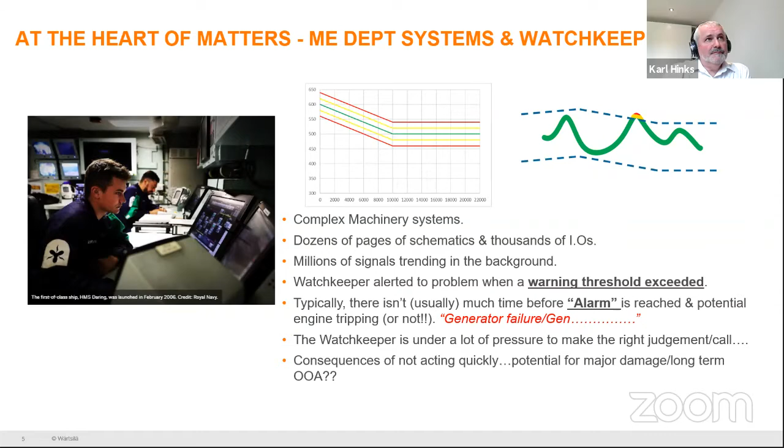So up until now, we've got machinery parameters, if you like, hundreds, if not thousands of different signals from the engine. And you have basically an envelope in which the equipment will operate. And it will come into alarm when it exceeds a particular threshold. And it may well shut itself down, or it may well come back into limits, depending on a lot of different variables, including things like ambient temperature, air inlet pressure, differences in the fuel, calorific values and things like this.

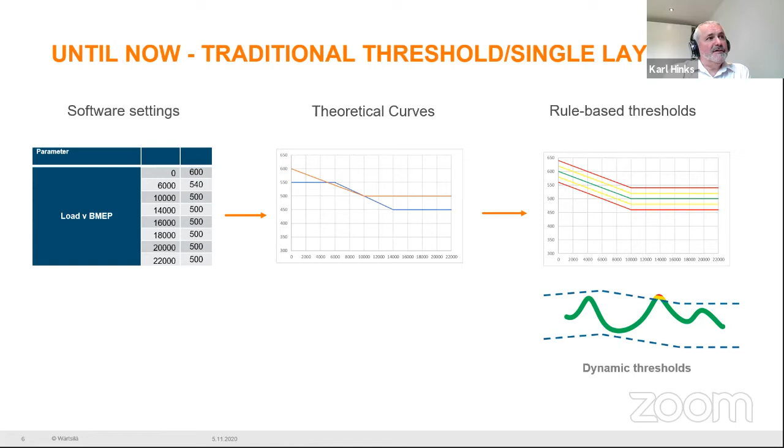So this is very much a kind of digital system. It's either in or out of parameters. The problem with that is that you don't get a very long time before you have to react, or the system has to react before taking the equipment out of service. And clearly you don't want to do that without bringing a second or a replacement generator onto the board.

So it's a bit like a human being. There's no way that he's going to be sitting in the machinery control room or ship control center looking for this information. And even if they're looking at the trending data, the differences in the signal parameters can be so small that a human would have difficulty identifying the anomalies, and it's very subjective, it's very individually based judgment on what the operator considers to be acceptable or not acceptable in terms of a parameter.

But essentially a computer can do this all day long, running in the background, trawling through the data and trying to learn what would be typically normal behavior and what would be abnormal behavior. And that's really where this presentation starts, in the role of artificial intelligence and machine learning. And every engine has its own particular footprint, if you like. It's not as simple as putting a threshold value, because due to a number of different factors, not least engine tolerances in the manufacture, but also equipment material differences, every engine will be just slightly unique.

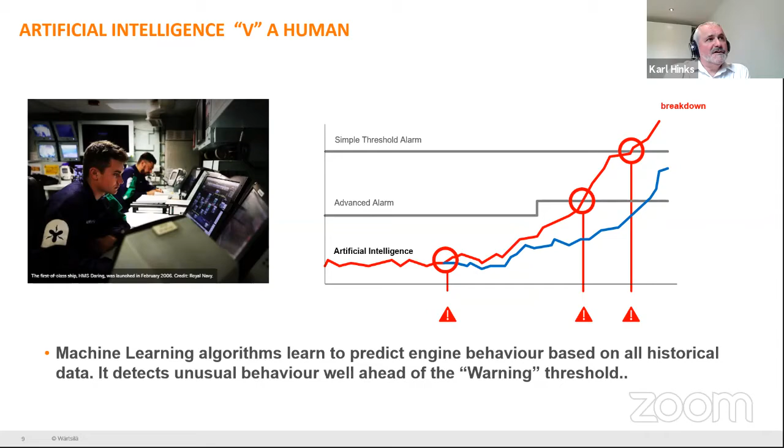So being able to learn the behavior and then identify anomalies, differences in behavior of a specific asset, is hugely beneficial. So for that, we use what we call two layers of detection, the artificial intelligence being one, and the traditional rule-based mathematical models being the other. And the system will look at both of those avenues and determine whether or not it's acceptable behavior, what it's expecting to see or not.

And at that point, the system will be analysed by an engine expert who has access to a lot of other experts as well. And in a little while, you'll see just how critical that can be, because artificial intelligence on its own is just a tool. What you really need is the kind of interrogation, the analysis and the experience to be able to make a judgment based on what you see.

And clearly, we don't want to be alerting the vessel every 5 minutes of a small change in a parameter if it really doesn't matter. On the other hand, we absolutely want to be alerting the user to issues that are going to ultimately cause either wide-scale damage or impact on the safety of the operators.

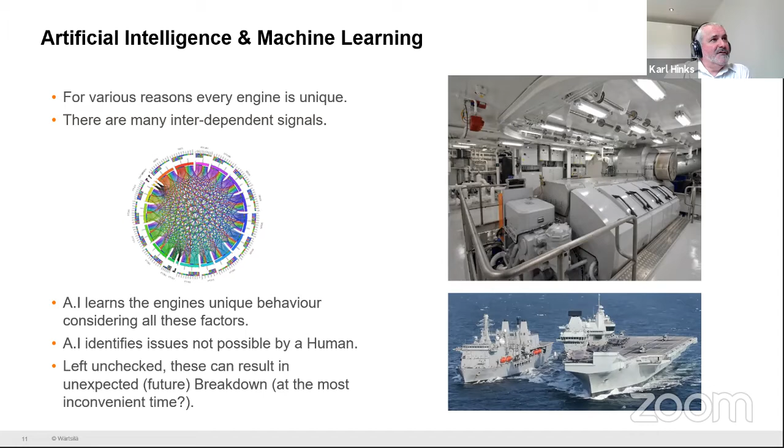So, however good your people are and however well trained they are, they're never going to be as knowledgeable as the experts, the OEMs. But equally, navies don't want the OEM rocking up every 5 minutes and getting involved with breakdowns. It's just not cost efficient. If you can automate that and you can do stuff remotely, then that makes an awful lot of sense.

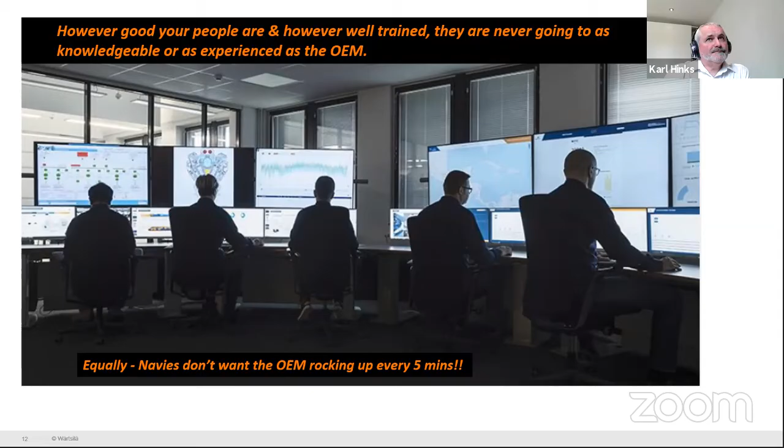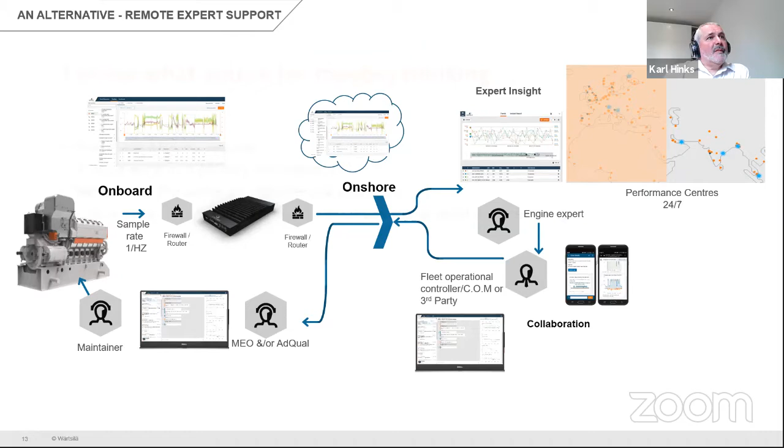So I know what some of you may be thinking, that these are military vessels and it won't necessarily work in a military environment. And yeah, you're not commercial vessels, and knowing where you are and what you're up to, you don't want others knowing that. But if you think you're any different to the commercial operators, I don't think that's necessarily true, because they have the same concerns and the same problems. The enemy may be different, but the task is the same.

So whether you're an LNG carrier or a cruise ship, having the artificial intelligence look at the data and alert you to potential problems is hugely beneficial. Especially if you took a cruise ship, for instance, the amount of equipment and systems on board there, and the cargo is very vocal, and it's all very much in the public domain if things don't go quite to plan. It's just that you do business in slightly different ways.

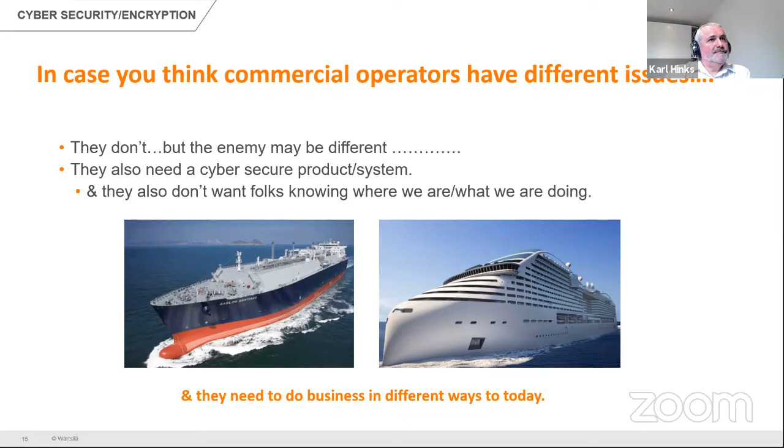So here's an example of a real case. This was a vessel, a dual fuel engine shuttle tanker. It was en route to pick up its cargo. It had the expert insight system fitted. And the screen now gives an indication of how the system communicates with the vessel. This may well be slightly different in a warship, given the encryption needed or the timing of the communications.

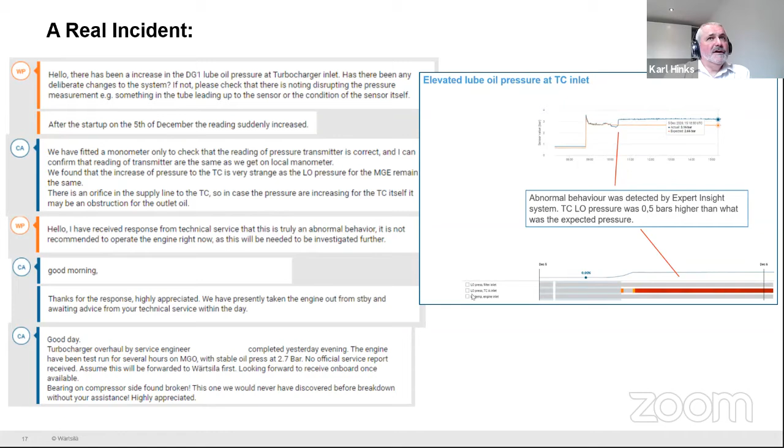But essentially, what happened here is that, given the data that had been transmitted to the performance center ashore, the operator then said, well, we've spotted something that is an anomaly. Please go and check the obvious. This is when we found that we saw a difference. And in the meantime, I'll go and talk to the turbocharger specialist.

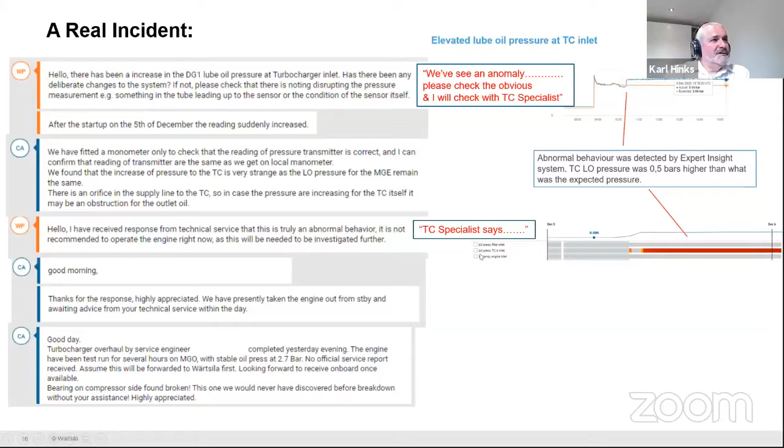So sometime later, the crew said, thanks for that. We'll fit the manometer. And yes, we agree that there is a very small variation in lube oil pressure to the compressor bearing of the turbocharger. Now, ordinarily, a lot of people might just say, well, it's a small increase, not a problem. If it was a decrease, that might give them cause for more concern, perhaps. So at a certain point in time, the turbocharger specialist gave his feedback, the operator was contacted and said, yeah, we really need to get the engine shut down and investigate further.

So this is what the expert knows as well. I was surprised actually, when I started researching and looking into this, just how powerful and how dangerous turbochargers could be. The sort of forces involved and the velocities involved are incredible.

So for a 10 megawatt turbine power, which I grant you is the upper part of the scale, you're looking at 97 tons per blade and 3,200 tons for the whole unit, which is essentially the same kinetic energy in the shaft as a large truck traveling at 95 kilometers an hour, which surprised me. And that's not to mention the temperatures involved. So if the turbocharger lets go, you can imagine what happens to the shards that come off the turbocharger should it catastrophically fail.

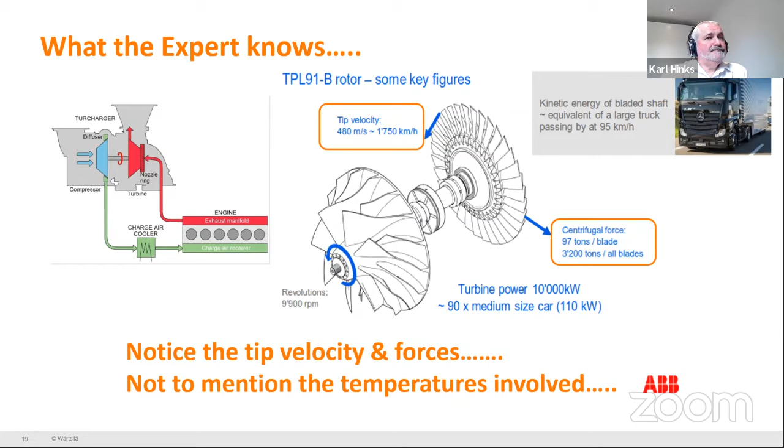So here's the other end of the scale. This is off an 800 kilowatt turbine. So that being around about the size of the output of 7 medium cars, family cars. Same sort of thing, kinetic energy is significant. So it's still the size of a medium-sized car passing at 90 kilometers an hour, which is still pretty scary.

I was talking to one large ferry owner probably a week ago about this exact thing, who, and I quote, said: "We've had several let go, and you don't want to be in the engine room when it happens." So this sort of thing can and does save lives.

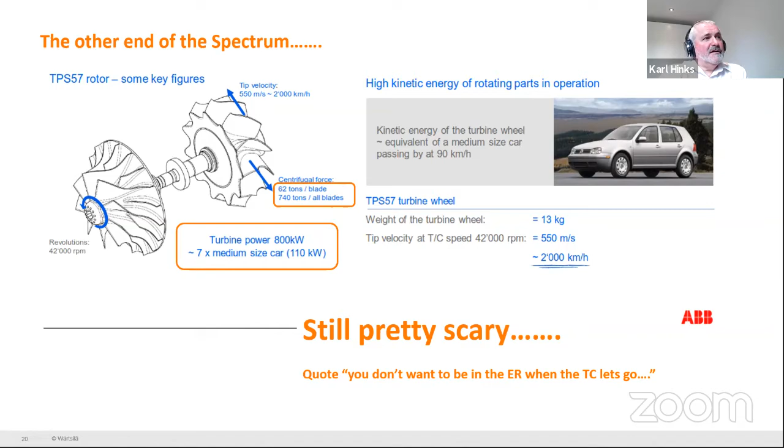So in terms of turbocharger behavior, this is just a slide to show you the sort of damage that can occur progressively over the life of a turbocharger, depending on how it's operated, the environmental conditions, exhaust gas temperatures, the number of cycles and the load. So creep is something which a lot of navies will be familiar with, gas turbines in particular. Won't come as any surprise, but also cyclic fatigue, which obviously imparts a lot of stresses in certain key areas. So these are the things that can become problematic.

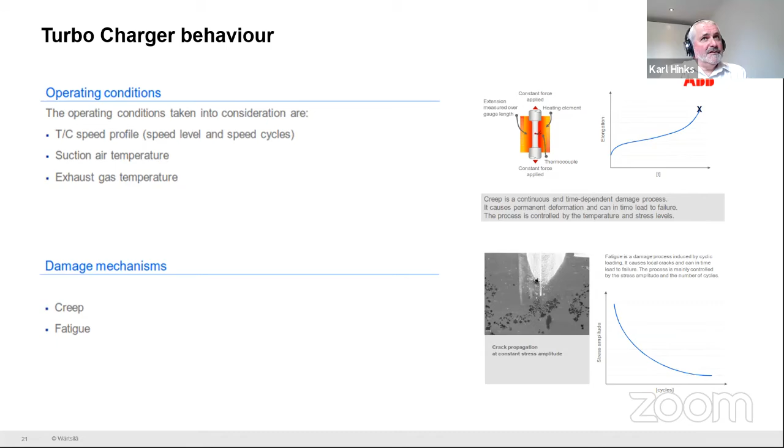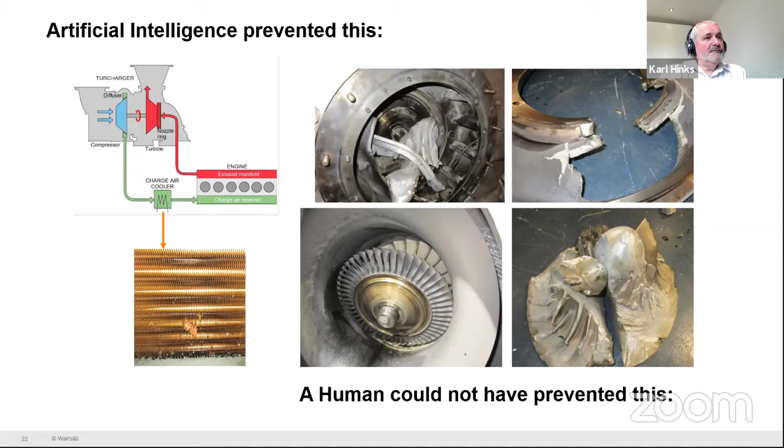So I'm pretty confident in saying that in this particular case, having the artificial intelligence absolutely prevented something like this happening. And this is an expensive piece of the engine. You know, it could cost upwards of 300,000 euros, or maybe $500,000, depending on the size of the engine. It is significant money. But not only that, if the parts of the turbo decide to deposit themselves in the charge air cooler, then that's even more work. So it's a significant catch, if you like, from preventing a failure.

So here's another example which naval vessels and operators will be very familiar with. It's quite common, in fact, certainly from my time at sea, that we saw fuel dilution of lube oils. And typically we used to analyze the lube oil sample locally on board, but we also used to send it off remotely to somewhere like Cobham. And quite often it would come back saying, you've got a percentage dilution of lube oil. Nobody got excited, but it did mean that we were going to have to change the lube oil.

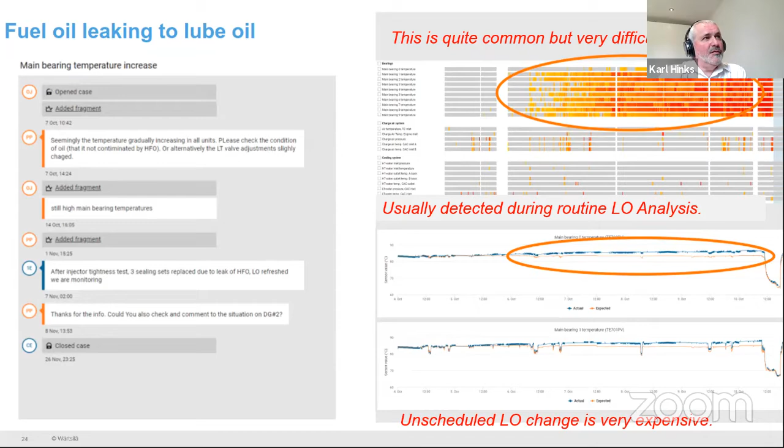I think what isn't readily apparent is, well, what happens if it continues? We're already seeing high main bearing temperatures within this engine. So if it goes unnoticed, or you don't do the routines that you should be doing, then this can end up with big end bearing or main bearing failures. And lube oil is expensive, and all fluids are quite critical to endurance of a warship. So it's quite awkward to be ordering tankers or large volumes of lube oil when you're deployed.

So at this point, we've looked at artificial intelligence and how it can be used to prevent the unexpected. What I'd like to do now is to move on to cover a bit about data-driven maintenance. This is quite a short section, but it's still quite important because the data that you're collecting is very important to be able to know whether or not intervention is necessary. And while doing maintenance to maintain the maximum level of availability and readiness in the vessel is important, perhaps less important, certainly in past years, is looking at things like engine efficiency.

And if engine efficiency drops off, then it may not be a big issue, but it may impact on endurance and the frequency of replenishing, because you're clearly burning more fuel than you need to. And it may be a small amount, but it may be the case of a day's transit. It could be important. So the other thing is maximizing component lifetime. So in the commercial world, that would be value for money, and trying to get the engine or the asset to the sort of values that are predicted by the engine OEM.

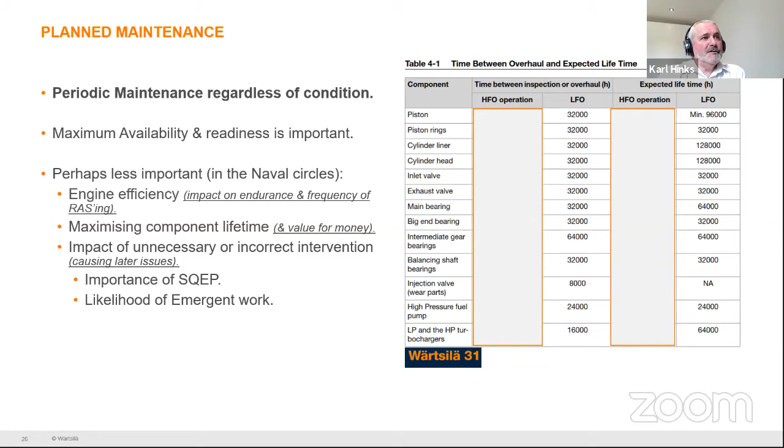Some would say prevention is better than cure. I think that was a Dutch philosopher, I don't remember his name. And some people would say if it's working well, leave it well alone. Yep, the caveat being that provided you have the data to support that, and you know how to interpret it. And I recommend fluid analysis at the same time. So it can be economic to employ data-driven maintenance and only intervene when the data and the evidence support it.

And when I put data-driven maintenance reducing risk, I put this slide up. This is a typical conclusion of a P&I Club report on main engine damage. So you can see the sort of things that they think are contributing quite significantly to the cost of machinery damage to the pool of people within the P&I Club, or which are being claimed on machinery insurance. And one of those being not having the experts in attendance at major overhauls, or insufficient training and experience, that can cause issues later on for sure.

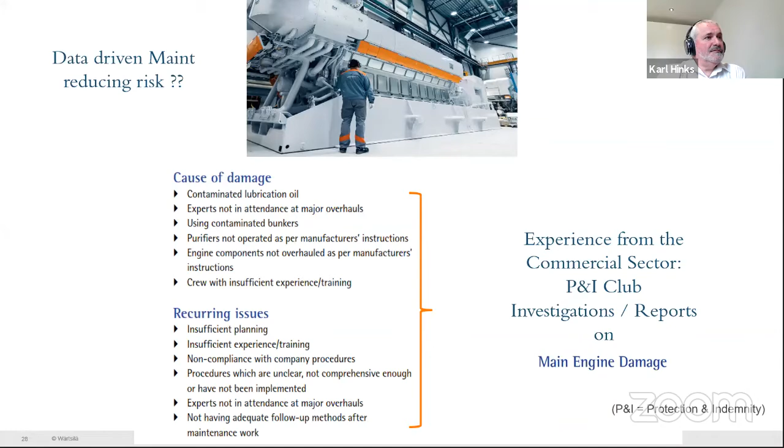So yeah, one thing I don't want you to forget, which gets taken for granted certainly by others in the vessel, the warfare department, is that machinery spaces are inherently hazardous, probably just as much if not more so than weapons spaces in terms of hydraulics and electrical machinery. Clearly, we've got a lot of systems with fluids and gases, high pressures and temperatures, hot surfaces, rotating machinery, and free surface occasionally in the bilge. And any identification of potential defects will help prevent catastrophic and costly failures, injury to personnel, and extended times to repair.

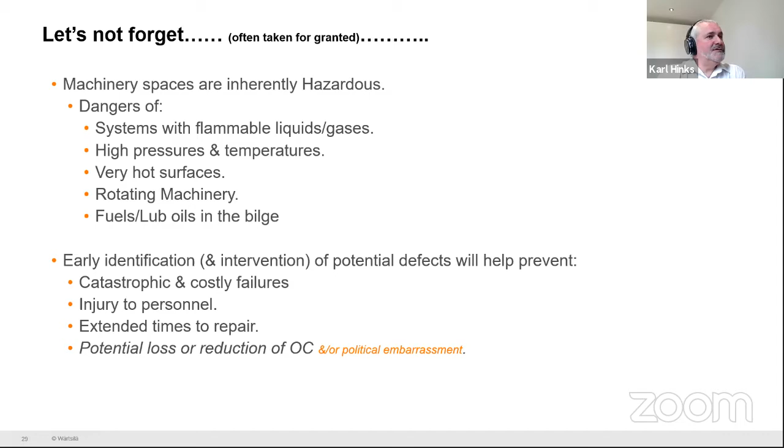Not least to say that if you're operating in a task group, which most times you will be, then it could cause political embarrassment if you can't fulfill the role in which you're employed within the task group. So I put this in to say who can relate to this, and it's basically saying that after a period of planned maintenance, HMS X sailed from Portsmouth for operational sea training and subsequent deployment, 50 minutes after passing the nav tower, increasing speed to 15-20 knots, then high bearing temperatures, closely followed by machinery breakdown, standing sea fire party close up, and ultimately, God forbid, fire.

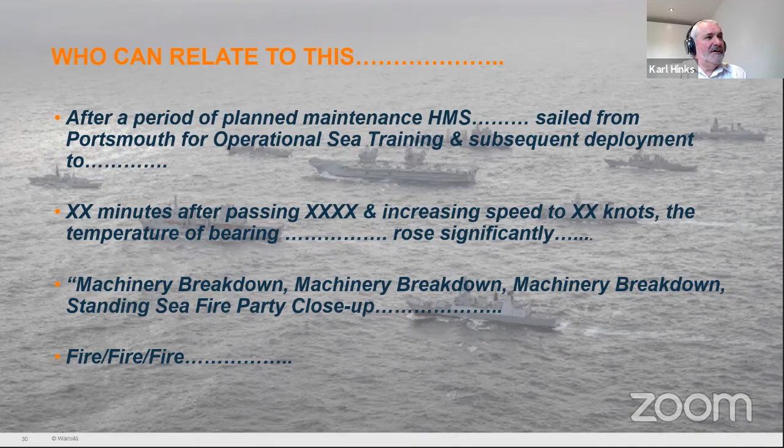So that was quite a common occurrence, I would say, during my time. Not necessarily the fire, but certainly coming alongside to do maintenance, and then not long after leaving base port, the equipment that had been maintained was typically the ones that flagged up straight away to be problematic. Could well be down to intervention, maybe not, by non-subject matter experts. But the fact is that it was decided to open the gearbox up or open the engine up because it said so in the planned maintenance. The problem was that nobody could tell you either way, good or bad, whether that was a good or a bad thing to do.

So the principle of data-driven maintenance is obviously a black box data collection unit, looking at all the signals as we've shown previously with the artificial intelligence. But then from that data, you can decide whether you may have to bring the maintenance forward to match up with a deployment schedule, or do small inspections of maybe one cylinder coupled with the data from the data collection unit, followed by OEM advice. You may be able to push whatever maintenance it is either later into the same window prior to deploying or further.

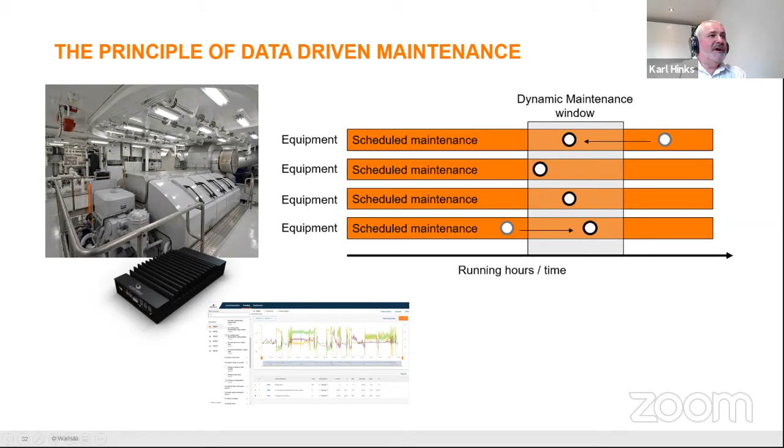So yeah, it's having that information and being able to make decisions based upon it. So in conclusion, we're probably a little bit ahead of time, but I'm sure we'll have plenty of time for questions. In conclusion, a warship is a very power-hungry beast, and it's dependent on a high-quality, reliable source of electrical power. As I've said, the engine is unique in many ways because of machinery tolerances and also where it's fitted in the ship. So you might have a long inlet or a long exhaust trunk, or the ambient conditions where it's sucking from. It's one thing just taking the data and trending it, but by and large, and naval circles are not alone when I say this, the data tends to go in a drawer and is not used or acted upon.

So for sure, engineering judgment is made easier with data. And I would say artificial intelligence is a step change and essential for complex naval platforms in their daily life. It's a system which can learn, and it spots anomalies very early. It does things that the human can't do, and it provides a level of control over the reliability and performance of the engine. And modern technology means that this is achievable today safely and securely, cyber securely. But AI and data are nothing without having the expertise and the understanding to be able to provide the support and the advice to the user.

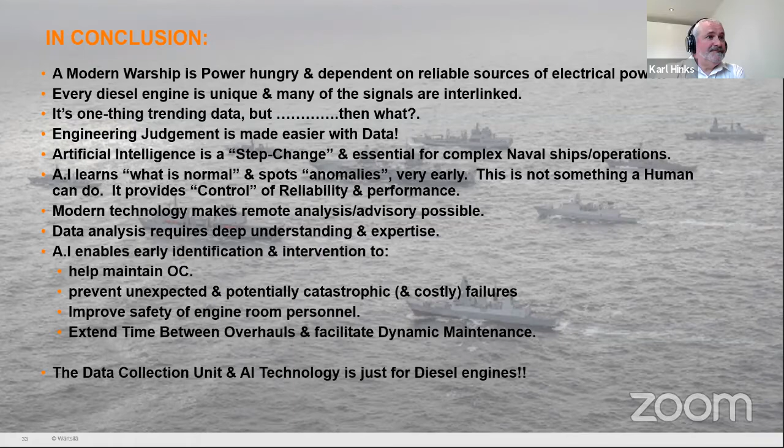And that really is me finished. I hope that was enjoyable and beneficial. Great, thank you very much indeed, Karl. That's it. Stop the screen share. That's great. We can get into the discussion. So thank you very much for your presentation.